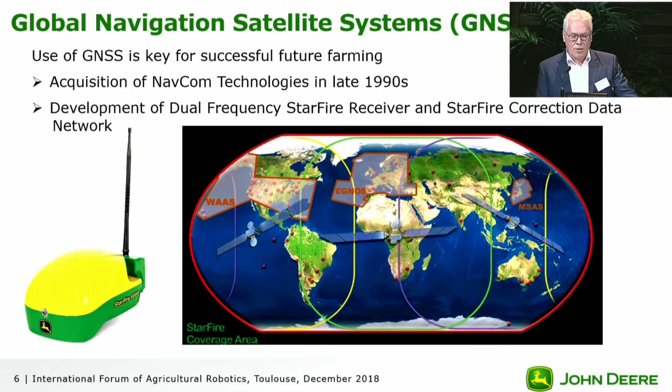So what have we done towards automatic steering solutions? Already in the late 90s, I think we were convinced that at that time GPS is important for a successful future farming. That's why we acquired Navcom Technologies, and then we developed our own receiver and our own correction data network at that time to be able to steer the machines or to locate the machines first. With now in the meantime, I think with the correction data, we come to 3 to 4 centimeters accuracy with that correction data network. But we started with GPS and GLONASS, but we had challenges first with GPS only.

We didn't see enough satellites, so in corner conditions, trees, etc., you couldn't really use the system. Then we added GLONASS, that helped already a lot. And now we are just in the process of Galileo, adding Galileo and Beidou. We have already software running. It again improves accuracy to below 2 centimeters, but that's not so much more important. The more important thing is it's really now really stable. Nearly everywhere you can use the system, even if you have trees on both sides, you can still run the automatic steering system. It is not a holdup.

So I think I'll stop here saying that these multi-constellation GNSS receivers, they are now so reliable and work nearly under every condition, corner conditions with trees, etc., that these systems have been used for automatic steering systems, which are very successful.

You see here these pictures, they are already at least 10 years old. We introduced automatic, at that time, GPS-based steering systems in 2003, so exactly 15 years ago. And in the meantime, we have added functionality, so you can really run these tractors in the field without touching anything in the whole field. The system would turn automatically, it would lift the implement, etc. And that is now working very well.

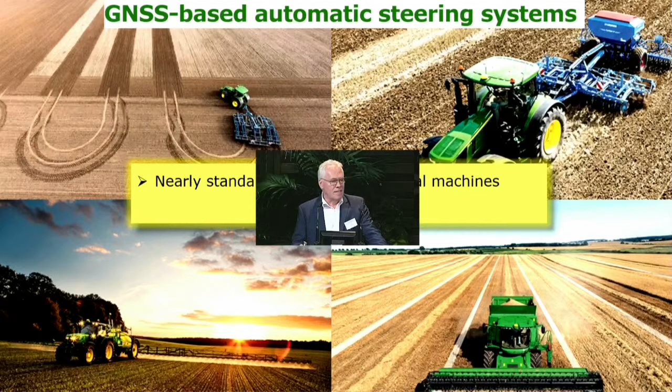And I would say it's nearly standard now on larger agricultural machines. So when I look into our sales and our orders, starting at 150 horsepower, I think a tractor is ordered with such a system. And so we have sold already hundreds of thousands.

We also see a trend towards higher accuracy, so customers want to have RTK. And now that this works so well, this is also a prerequisite for a lot of autonomous vehicles to have this high accuracy in the field where you have no trees or nothing which can guide you.

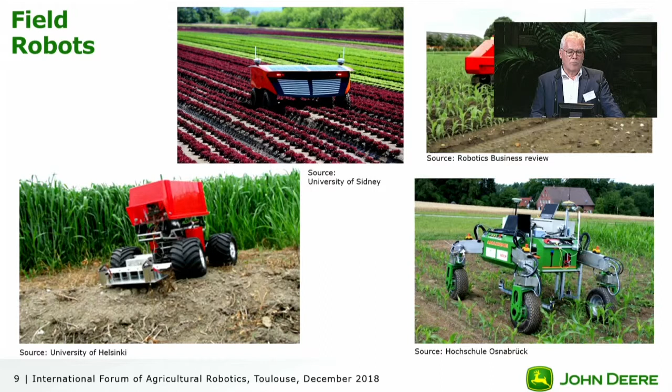Also Professor Noguchi has already shown Kubota, they have made announcements around this driverless combine or tractor, or that small rice transplanter. We have seen that our competitor Fendt has shown a small robot called Xaver for planting corn or maize, which is still, all of that is not commercially available, but has been announced to become commercially available soon.

And therefore the question is, what is John Deere doing? I only want to show you here some videos, and you see they are old. On the top left, that's a tractor that we showed in 2003 at Agritechnica already, without a cab, for use mainly in orchards, for spraying.

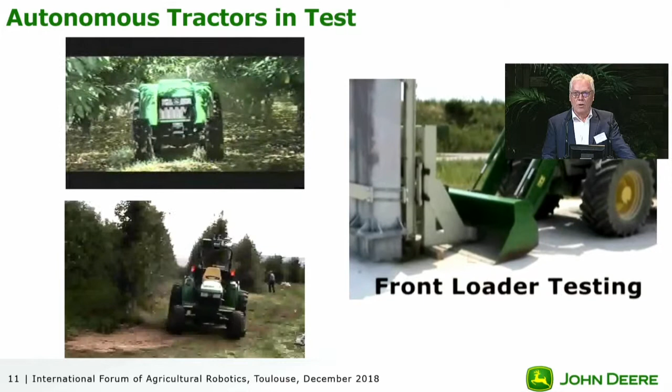We had also another tractor below. On the right-hand side, you see tractors running on our test center, where we do durability tests. So there are no drivers on these tractors, we just run them 24 hours to see that they are reliable. So in general, the technology, like I said, is 15 years old, the technology is there.

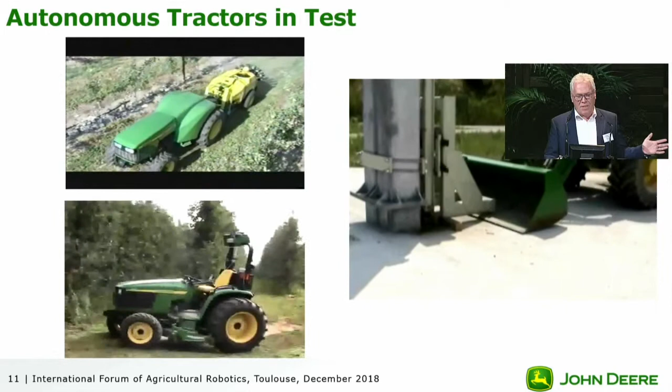So the question is, is this the future? Will they be replaced by fully autonomous systems? And you see here, that guy, he doesn't have a remote control, he has a drink, he's just watching. He's not controlling these machines.

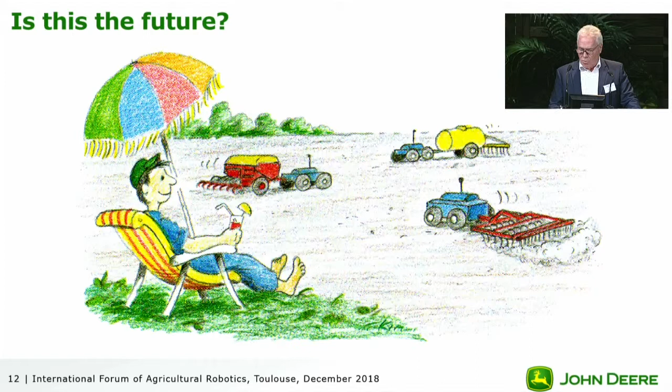So I would say I don't have a crystal ball, and I'm not a prophet and can say when that will come. Definitely some will come, some might not come. So I don't expect, or we don't expect, robots for all areas of agriculture, because we still have challenges to overcome, but we also have drivers who will speed that up. And I want to talk now about drivers and challenges.

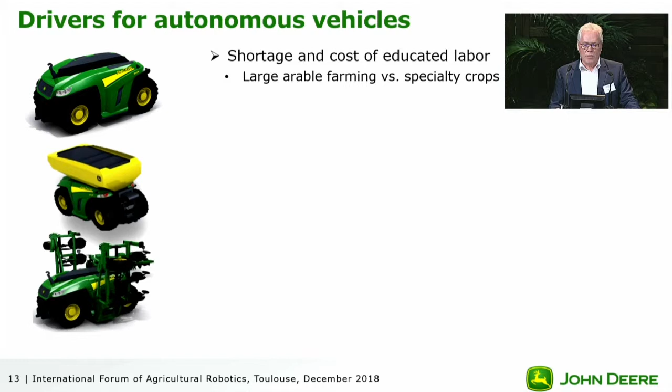So one, we heard that already very often: the biggest driver for autonomous vehicles or field robots is probably the shortage and the cost of educated labor. And here we have to distinguish between large arable farming and specialty crops. On large arable farming, wheat or maize, the costs of labor are so minimal.

So to take away the driver from a large tractor, that doesn't save a lot of money. That's definitely below 5%. Only the introduction of AutoTrack, our automatic steering, has already improved productivity by around 10%.

But it's different in specialty crops, because either we have no machinery at all, it's still manual, and therefore labor is very, very expensive. Or we also have the issue that we don't find labor anymore, so we don't find people who want to do that job. And we heard that last year already in the UK, 30 or 40% of the strawberries couldn't be harvested.

Because they didn't find people to do the job, because the Romanians didn't come anymore due to Brexit. And we hear similar things in Germany. We have a lot of Eastern Europeans who are coming for vegetable growers, and it's getting more and more difficult. So there, definitely, we need robots first.

On large arable farming, we also see that in some really large areas like Kazakhstan, where you have a field with 1,000 hectares, you run a tractor one hour in this direction, turn, then drive another hour in the other direction. That's so boring nobody wants to do that anymore. There it could also come on large machines, but mainly in specialty crops.

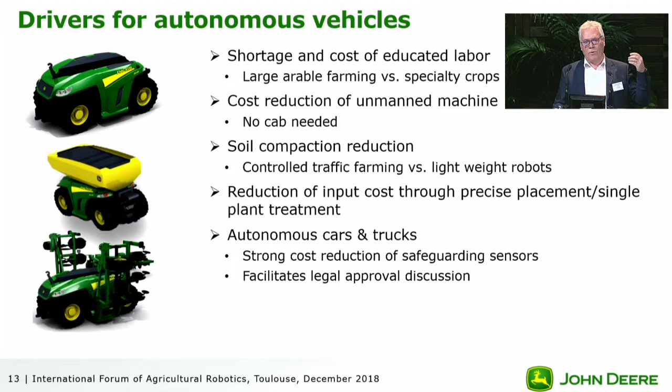One challenge is to bring the machine to the field. On trucks, we talk about platooning, so that you have one truck followed by two other trucks without a driver, and the other trucks following so close that no company or passenger car can get in between. If that would be allowed, that you can run these trucks on public roads, then the same could be true also for large ag machinery.

Then we see a lot of educational focus on robotics. Robotics is interesting, a lot of students interested in that. You see a lot of student competitions around that. And we also see, especially here, a strong focus on venture capital and startup companies on agricultural robotics, even if probably venture capital companies haven't gotten it so far.

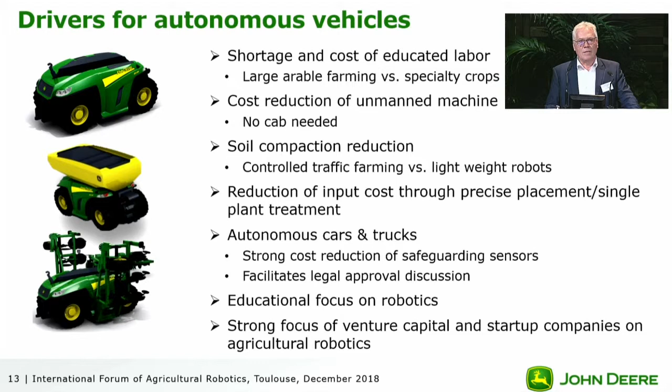Unfortunately, John Deere doesn't have a venture capital arm. Otherwise, I would have invested already in field robots. But these are all drivers, so there are a lot of things which will speed up the development here.

But there are still a lot of challenges to overcome. One is product liability, especially for a large American company with American liability laws. If such a robot would kill a human being, that would be a disaster for our image, but also financially a disaster, because we would pay hundreds of millions in fines. So our lawyers tell us: as long as this is not bulletproof, and as long as there's no really big demand from customers, we should stay out of that.

Legal situation, driving on public roads - we mentioned that already, that's not allowed yet. Then the safeguarding sensors we're using in cars, which are now so cheap - not all of them are usable for us in agriculture, because we have dust, dirt, fog, vibrations. So we still need other sensors, which in some cases still need to be developed. Then, we don't drive just from A to B.

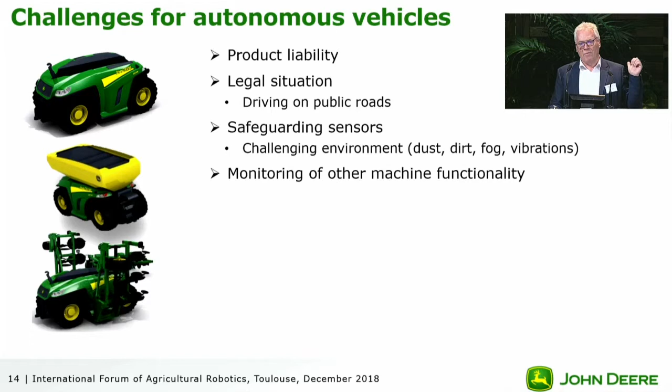On a farm, we do a job with our machines, and that means we have an implement who does something, or we have a combine who is harvesting, and there are so many things going on where we still see the value of a driver to monitor that. Let's say you have a tractor implement combination, you have a blocked pipe on a seeder, or you have residues piling up on a tillage implement. You can put sensors there and can stop the machine, but then somebody has to go there and remove that blockage. If that is somebody who sits in his office half an hour away from the field, that's a time-consuming event, and we have such short windows where you can do the right work in the field, so that would be a challenge.

Logistics was also mentioned. As long as you do weeding, that's relatively easy, but when you want to spread fertilizer or put seed in the ground, this gets more complex. If you collect harvesting material, that needs at least more work and more effort. And we still have that issue of transport to and from the field where we need a trailer or whatever.

When we talk about autonomous vehicles, we definitely need to not just say we take the cab off a tractor and everything is fine. In that case, we need to think about a total redesign of our machines. You see here just some examples, some sketches, of how such a machine could look like, what they could do. We probably wouldn't see a separate tractor and an implement—this would be more a combination.

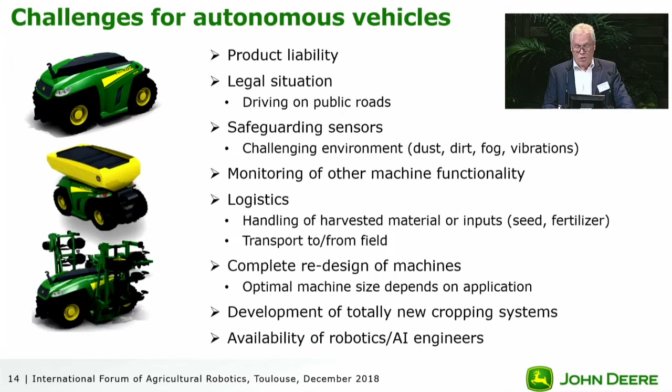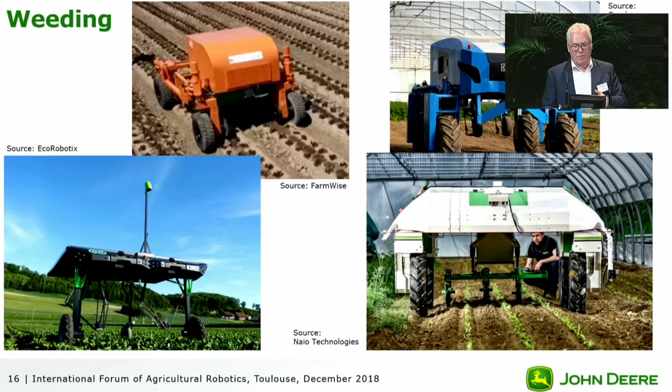So I come to the next point, and I can go very quickly because this has been mentioned in other presentations: what are the right applications for robots or for autonomous vehicles? You see here weeding, and some of the machines you can see out there, or some of the companies which are out there.

So when you talk about these applications and small field robots, you automatically ask, how can I do larger fields? Then we need to talk about swarms. So do we see a trend towards swarm technologies? I wouldn't say we already see a trend, but if the machines are getting smaller, this is the only way to reach some level of productivity.

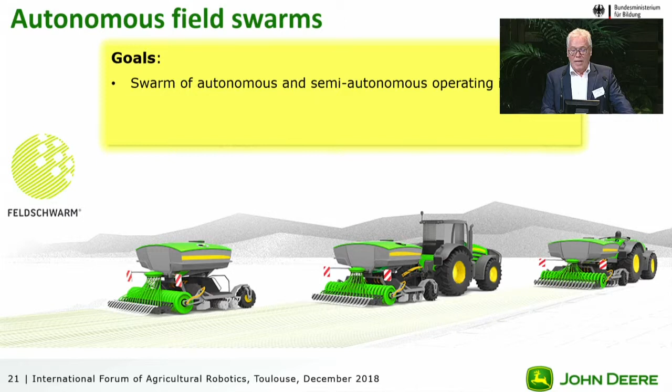We are also looking into that. We have at the moment a project funded by the German government called Feldschwarm, Field Swarm. Here we look into what could be a swarm of autonomous and semi-autonomous operating implements. On the left side you see just a running implement, no tractor involved. Then you see a tractor with a cab, without a cab. In that project we are looking at what is the right size for which application and how that could all work.

We think this will be very much electrically driven units. And with that we are quite sure that we can reach a much higher automation level with lower specific power requirements. So Field Swarm is something where John Deere is also looking into it.

We also look into the role of electrification, because a lot of these robots are sometimes using batteries, we still have some with diesel engines. But we are convinced that electrification will become more important, and so we do it there. We want to be prepared.

This is, for example, a tractor that we showed at the SIMA farm show here in Paris several years ago, and we got also an innovation medal. The challenge is, this is a tractor full of batteries, no engine, no transmission, but it runs only 4 hours on the street, and let's say 1 hour if you do plowing. So the power density is just too small, not usable for 24-hour operations on large farms.

So what are the options? When you talk automotive, they say fast exchange of battery packs is one option. You could use solar panels for low power applications, we see that on the Ecorobotix robot. Fuel cells is something we are looking into. And one option is connecting the machine to the grid, because nowadays we see more and more wind turbines, and a lot of areas where you could easily connect to the grid.

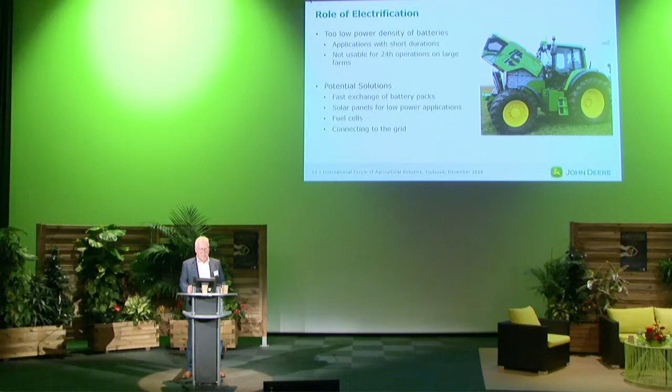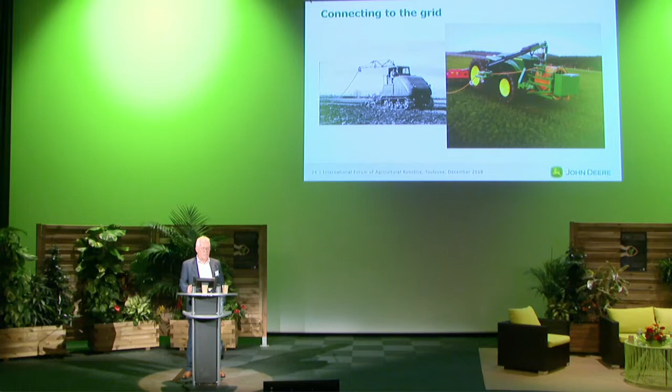Here you see an example from a machine from Russia from the 50s, an electric tractor powered with a cable. We looked into that and said, why not try that out? So you see here a project at our tech center in Kaiserslautern, a tractor, a pure electrically driven tractor without a cab. It has two 250 kilowatt electric drives, one for the implement, the other for driving forward.

It has that cable which is laid down when you drive up the field, and then when you drive back it's collected again, and this works perfectly. When you put John Deere autonomous tractor into the internet, you even find a video where you see how it lays down the cable and turns, etc. For the sake of time I didn't want to include that here because I only have 20 minutes, and I think they are now over.

But when you talk about this, we need to think of all alternatives, and that could be one. If you don't have a grid and batteries don't last long enough, why not put a container with batteries at the field site, and when that is empty after 24 hours, replace it with another one. So you still reach long working hours also with other technologies.

With that, I want to summarize. I think what we can say is GNSS-based steering solutions are mainstream already. We see a growing interest, research and venture capital in fully autonomous unmanned vehicles or field robots, however you call it. We see a lot of drivers towards autonomous vehicles, but we still have a lot of challenges ahead of us to overcome.